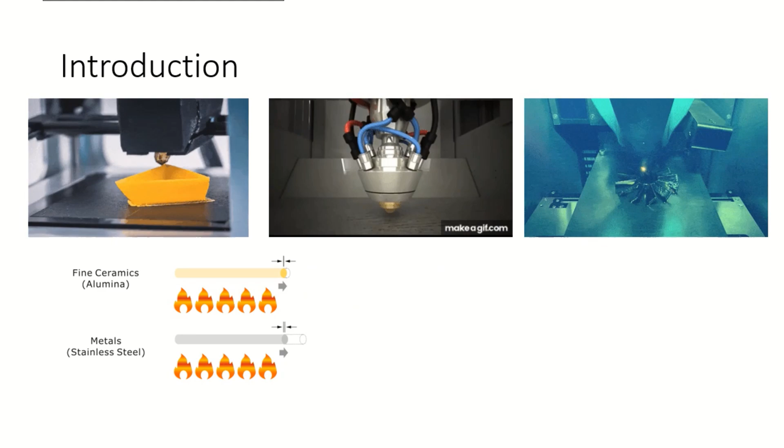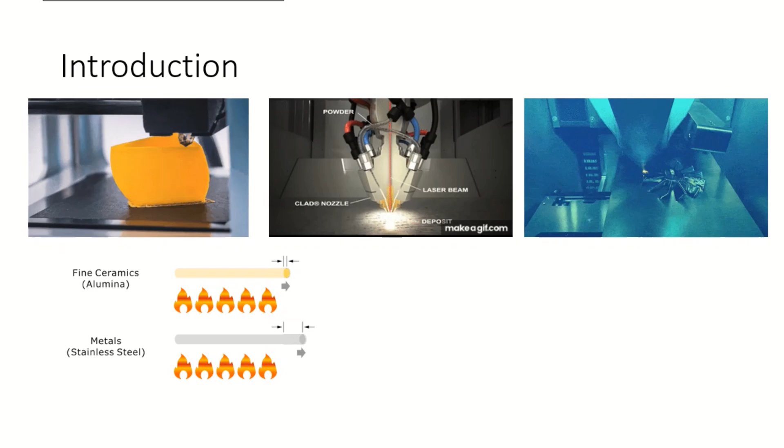In additive manufacturing, you'd normally associate that with a 3D printer as a machine that creates parts by adding small amounts of material, such as plastic, in layers until a complete part is made. We're taking that concept and applying it to metal. So this is called MAM, or metal additive manufacturing.

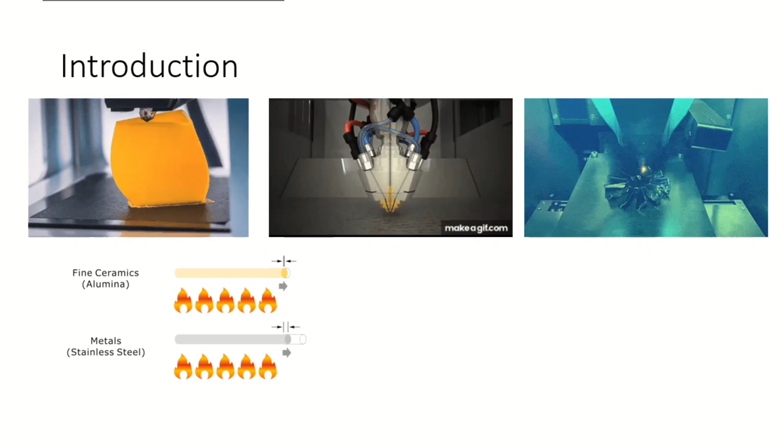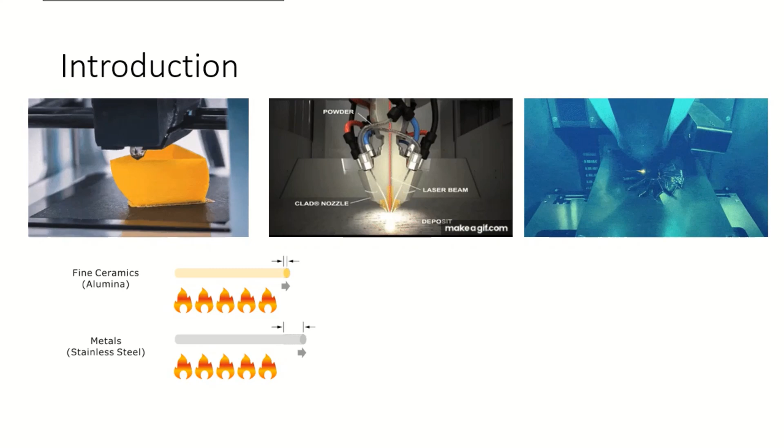The way this works is that you take an amount of metal powder or wire into a certain region and melt it. And this results in metal parts that are more inclined for heavier loads. Now, the drawback to this is that plastic has a give to it when it's printing. Metal does not. This is because as it expands and contracts, when it heats up, it pushes on the neighboring particles of metal. And this results in failure.

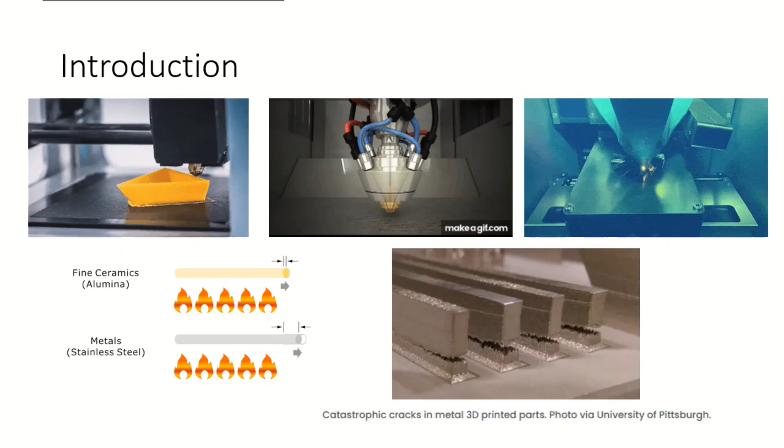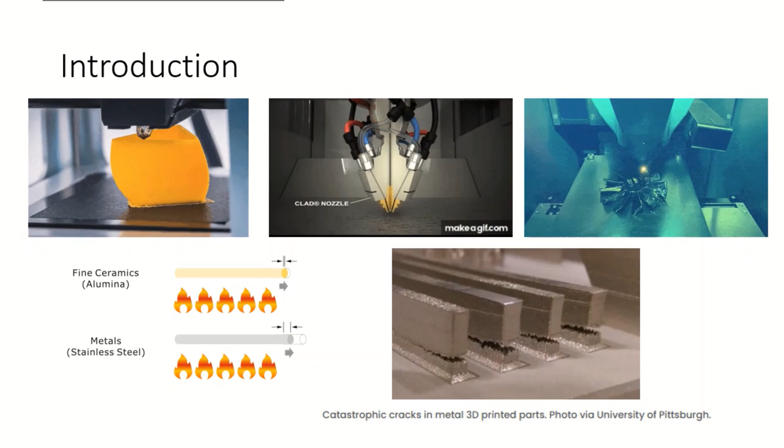So, how do we get around this? To minimize the internal residual stresses that cause these failures, we'll be using ANSYS AM DED process, which is an additive manufacturing simulator. Now, the way that we approach this is that we will go to SolidWorks, make a model, pop it into a geometry ANSYS file, and make a mesh from it. So it's a way of cutting up the geometry into small pieces for ANSYS to go in and simulate at a single moment in time.

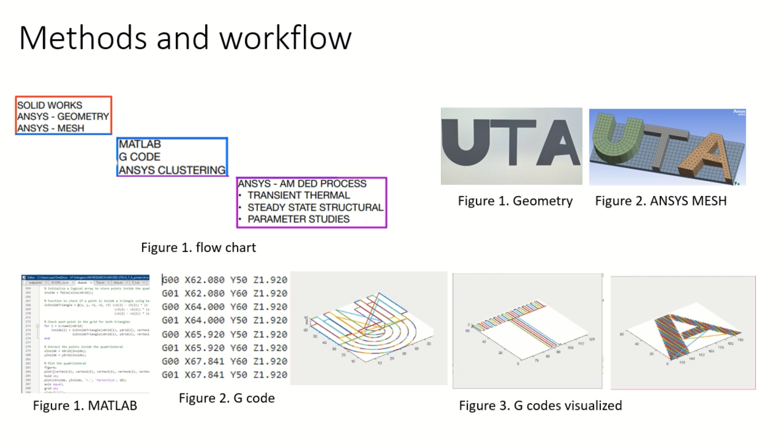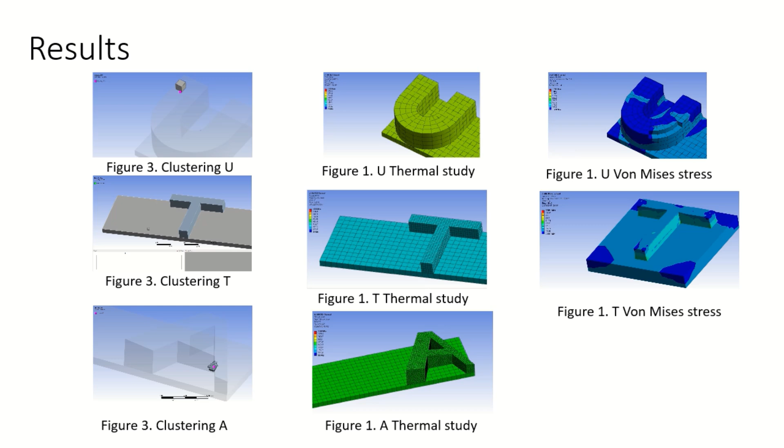And then a stress analysis is conducted. I believe that von Mises stress is used for distortion energy theory that's used for finding a safety factor. And this will help us find where the stresses are in a given part that we have. Now, there is also this one where we explore the minimum and maximum principal stresses, which is just a simple way of saying tension and compression, figuring out where it's pulling in and where it's pushing out.